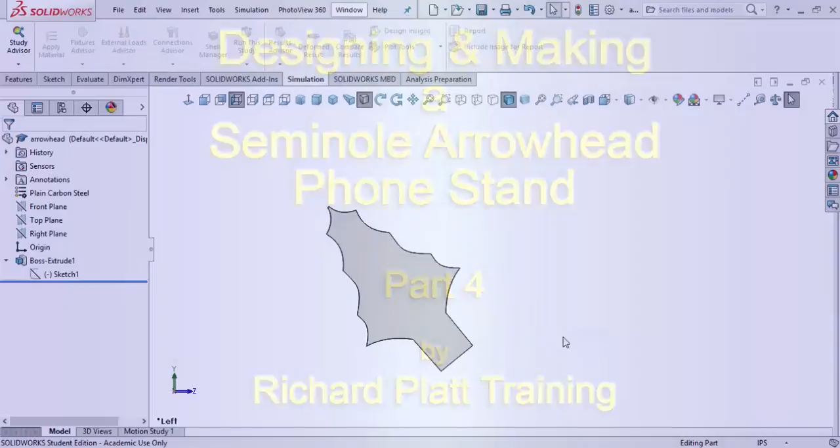I've gone ahead and opened up the SolidWorks Arrowhead file that I created earlier. Now, there's some problems with this thing that we've got to resolve and fix. First of all, if we're designing a phone stand using this shape of the Seminole Arrowhead, we're going to have to come back and rotate this so that this bottom surface here is planar to a horizontal surface.

In other words, you've got to rotate it so it looks like it's pointing straight up. Additionally, what we have to do is rescale it. Here's why we've got to rescale it. So let's come over here and do this first.

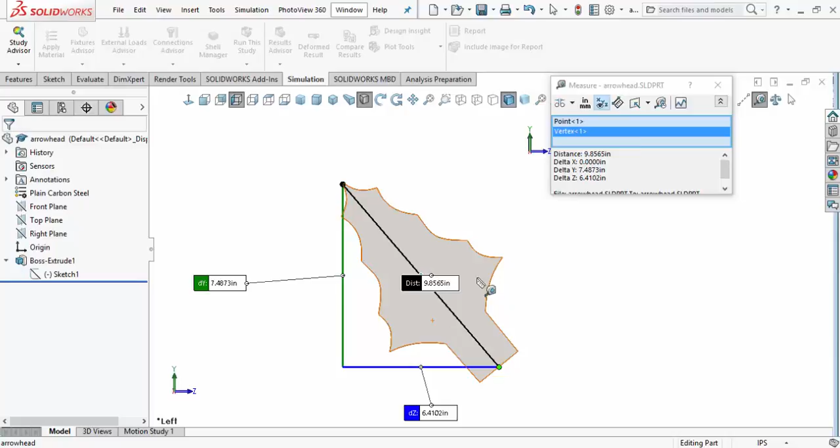We're going to select this point here and go up to the vertex at the very top here. And we're at about 9.8565 as far as the size. I'm going to go ahead and write that down. 9.8565. Okay, we got that written down. I'm going to go ahead and turn off my measurement capability now.

Now that I've got this done, I'm going to go over here to Features and create a new sketch. The plane upon which I'm going to do a sketch is going to be this plane here, so I set myself normal to that surface. I'm going to put in a construction line, horizontal and infinite, and click on this little vertex right there.

From that, I'm going to go back up to my measurement command and measure. First I'll clear this out right here, and now I'm going to measure from here up to there. That gives me a measurement of 39.29 degrees. Let's clear that off again and try it one more time. Yep, 39.2229. So we're going to highlight this guy right here and use him.

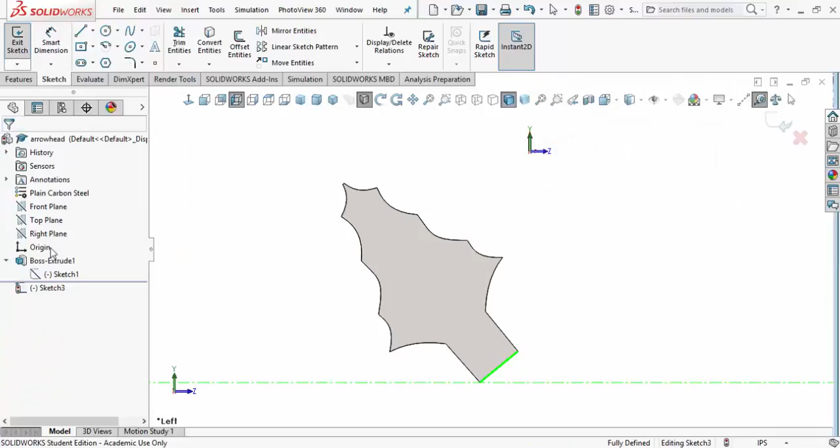Okay, so we may come back and use him. So we're going to do a copy. Once that's done, I'm going to go ahead and hit OK, and get out of that measurement command. I'm going to go ahead and rebuild my document.

And I'm going to come up to this particular sketch here. I'll roll this guy back to there, and go to this sketch. I'm going to edit that sketch, then come over here to my entities, and go down to rotate entities. It says entities to rotate, so I'm just going to highlight all this by drawing a polygon around it.

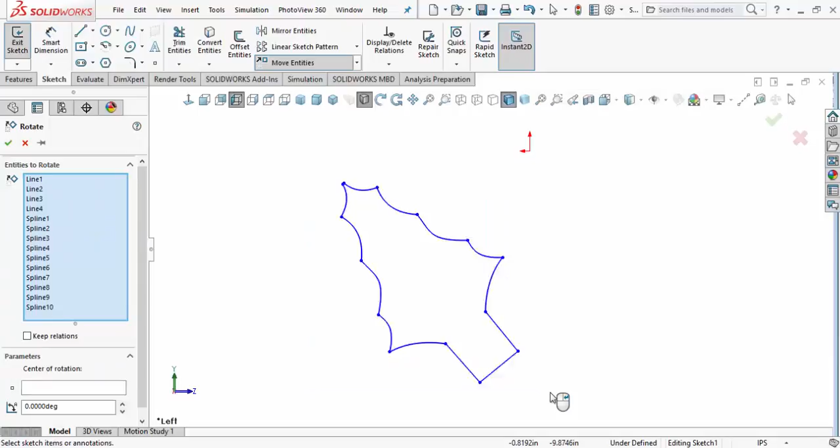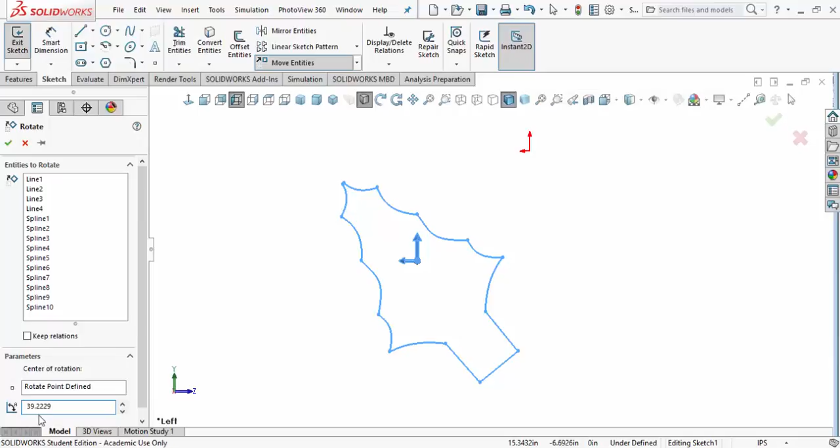I'm going to set my center of rotation to be out here, kind of finding the center of the part, like right here. Okay, looks like a good spot. And we'll go ahead and paste in the number 32 degrees. Let's do that real quick. Actually, it's 39 degrees. I'm going to go ahead and hit accept. And so it went ahead and rotated that to the correct angle. That's good, that's what we wanted.

Now what I'm going to do is a rebuild and a save again. Now what I need to do is I went back and measured some of my earlier phone stands. I need that arrowhead to be 9 inches tall. Well, obviously, excuse me, it is 9 inches tall. I need it to be 5 inches tall.

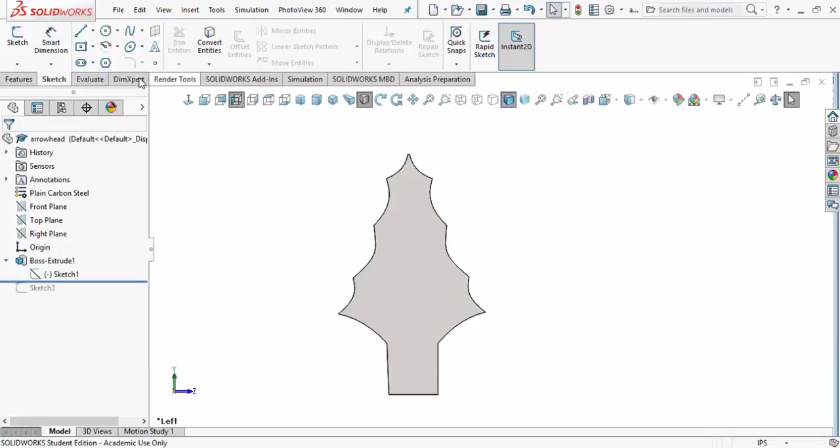So what I'm going to do now is rebuild again, save the document, and go back over here to these sketches, edit that sketch, and come down to where it says scale entities. Now that this blue field is highlighted, it's telling me to go find all the entities I want to scale. So I'll select all of those, and scale about that one particular point right here.

I'm going to go ahead—that's not the size I'm looking for. Let's do a little bit of math here. So we're going to clear all this out, and I'm going to say 5 inches divided by, let's see, 9.8565, and let's see what our number is.

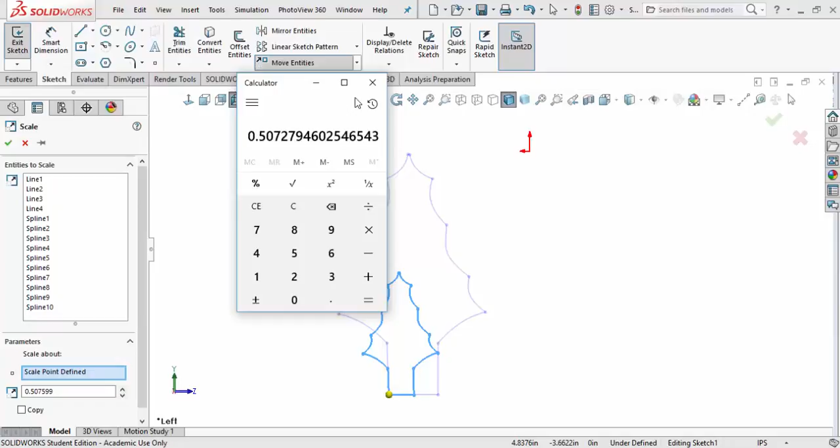Okay, it was that number. So we'll go ahead and copy this, right here. Just come up to this field, right mouse click and copy it. Come back to SolidWorks, paste that in as you can see right there, and hit accept. Let's see if it scaled it down. I'm not real sure if I got that or not. I may have to come back and do that again. Nope, still stayed at 9. Okay, no big problem, so we're going to get out of that again.

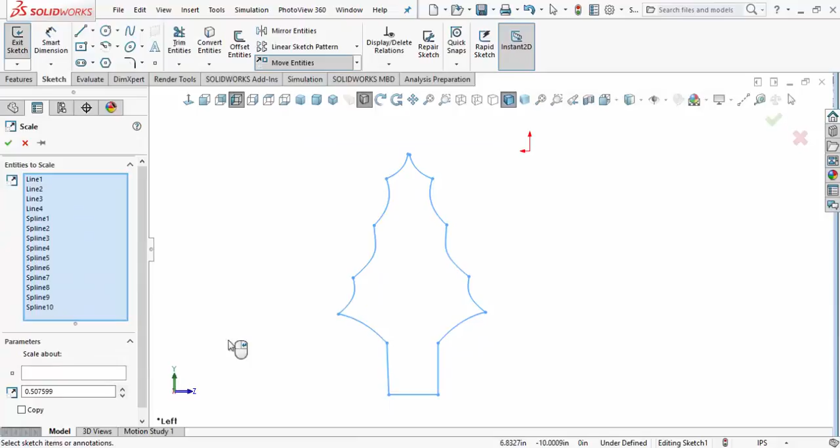So let's go back and make that attempt on that scale. We'll go over here to scale again. Sometimes it takes a couple times to get it figured out, but it's no big deal, SolidWorks will work. So I'm going to scale about this point here. Okay, and I've keyed that in at 0.507599. Let's go ahead and hit accept on that. Accept that. Yeah, it looks like it worked that time.

Let's go back and measure this. Go from this point to that point, and yeah, it says it's 5 inches right here, as you can see as I'll highlight that. That's what we wanted. Okay, so now we got it scaled down to the 5-inch size that we need.

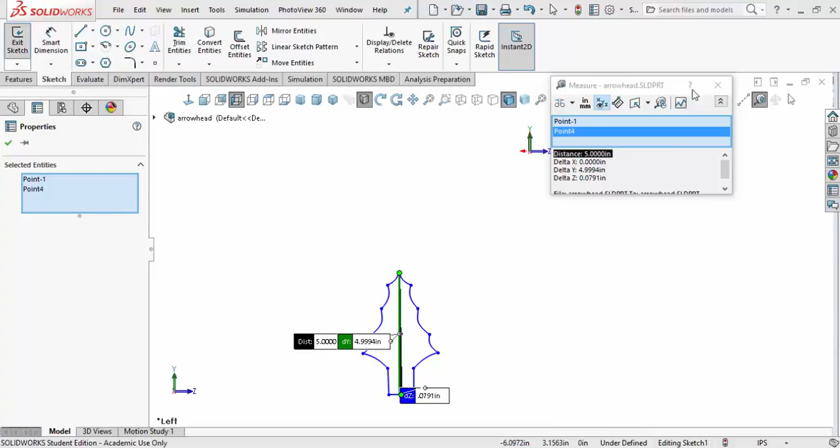That is great. We'll go ahead and hit the F key to zoom up, and roll this back. Actually, let's do a rebuild first, then a save. And we're not going to need that sketch we just put in for measurement and rotational purposes, so we'll go ahead and delete that as well.

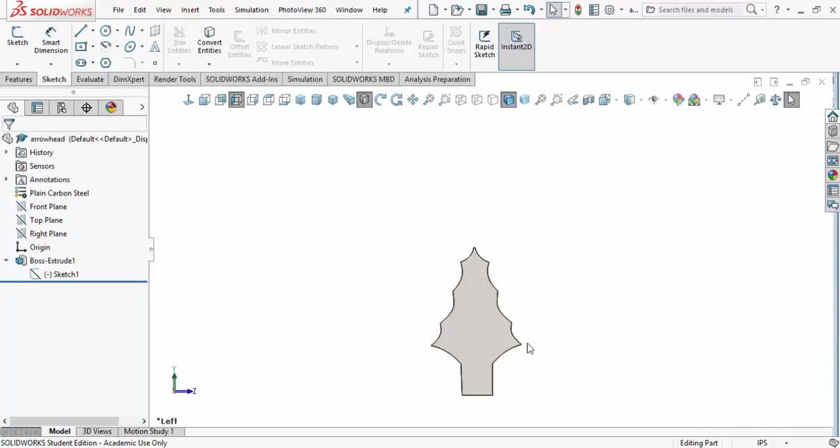Okay, that looks pretty good. Hit the F key again, scale that up, rotate this around a little bit. And there's one of our side pieces. Now we're going to come back and do a few changes on this here in a moment.

But for now, let's go ahead, again, save it. I'm kind of a save person here, I like to save a lot. And we'll come back to this in a moment.